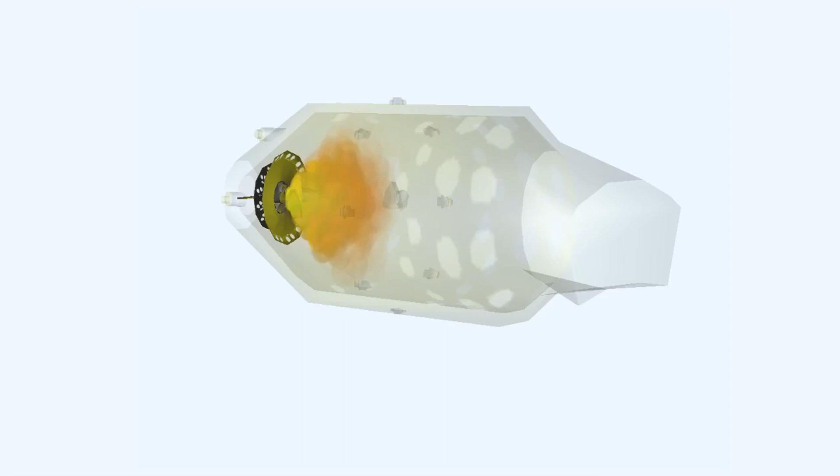As previously stated, theoretically combustion in the gas turbine engine occurs at a constant pressure. This is achieved partly through the continuous process of the Brayton cycle, and also by the fact that the combustion chamber is not an enclosed space.

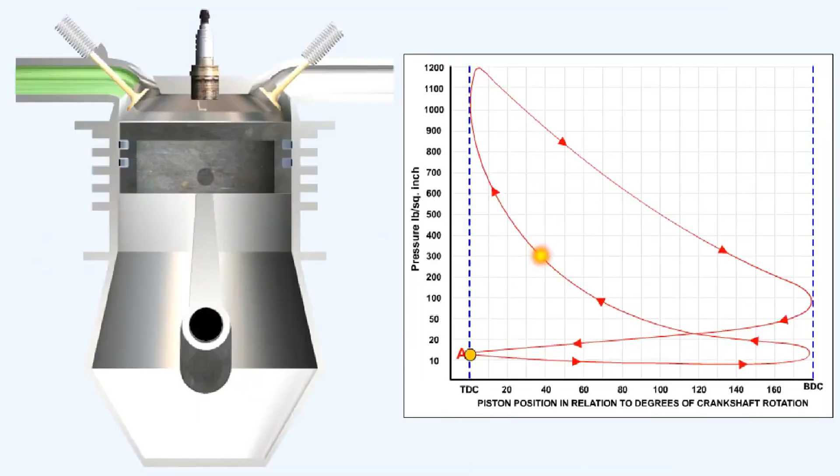These circumstances ensure that there are no fluctuations of pressure in the engine as there are in the piston engine, where peak pressures greater than 1,000 pounds per square inch have to be accommodated.

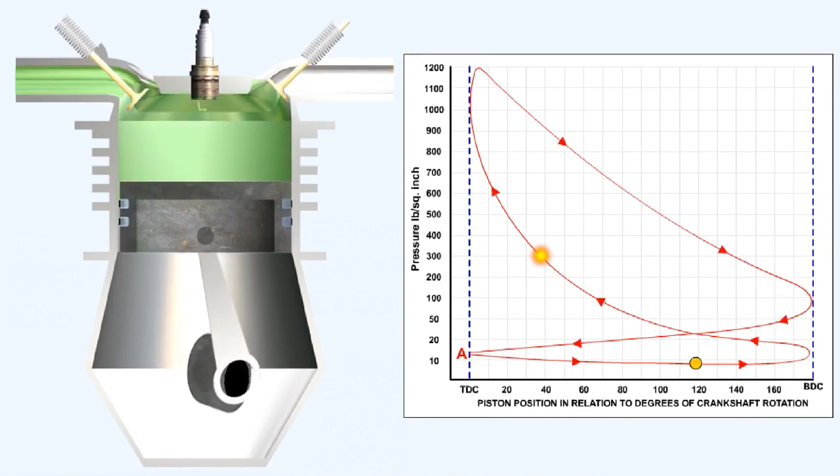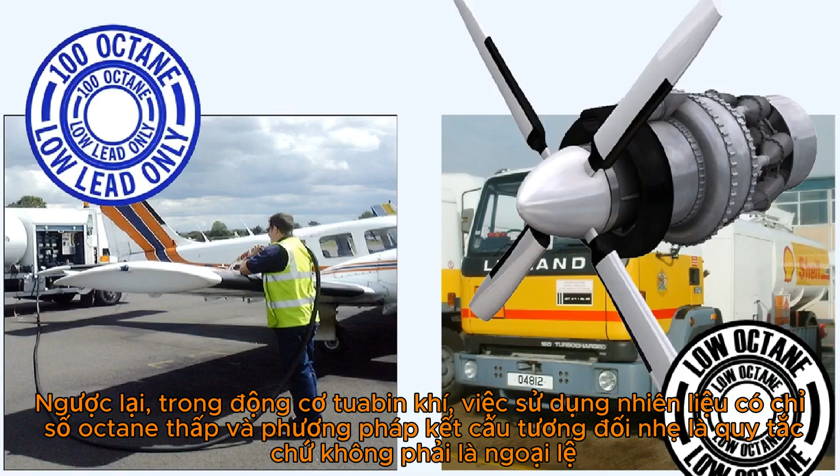These high internal pressures necessitate utilizing extremely strong and heavy construction in the piston engine, and also, if detonation is to be avoided, the use of high-octane fuels. In contrast, in the gas turbine engine, the use of low-octane fuels and relatively light construction methods are the rule, rather than the exception.

The turbojet is a heat engine. The higher the temperature attained in combustion, the greater the expansion of the gases, and hence the greater efficiency of the engine. There is, however, a limit to the amount of heat that can be released into the turbine from combustion.

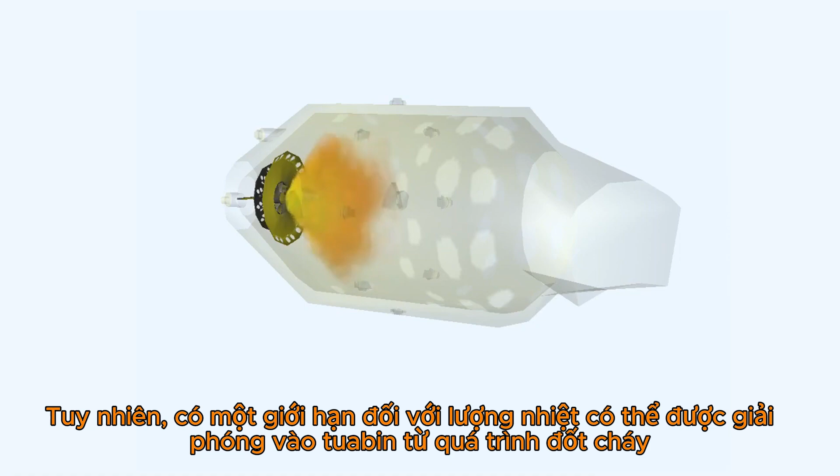This limit is imposed by the materials from which we manufacture the nozzle guide vanes and the turbine blades. The Germans' inability to produce materials which could withstand the heat of the gas stream was the main problem with the early German gas turbine engines.

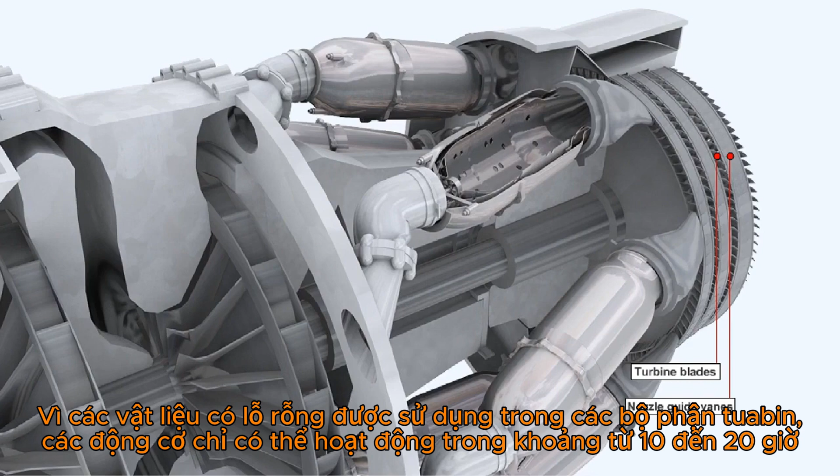Because of the poor materials used in the turbine assemblies, the engines would only run for between 10 to 20 hours before the turbine blades suffered meltdown and engine disintegration commenced, usually in a quite catastrophic fashion.

The use of modern materials and extremely efficient cooling methods in the nozzle guide vanes and the turbine blades has enabled the use of much higher gas temperatures in the latest engines. This has resulted in the more modern engines having a higher thermal efficiency than their predecessors.

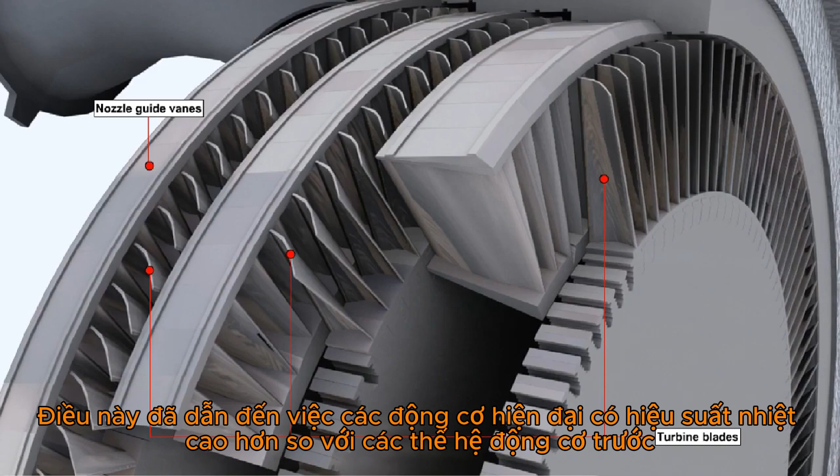Gases behave differently from the other two commonly studied states of matter, solids and liquids, so we have different methods for treating gases and understanding how they behave under certain conditions.

Gases, unlike solids and liquids, have neither fixed volume nor shape. They are moulded entirely by the container in which they are held.

There are three variables by which we can measure gases: volume, pressure, and temperature.

We'll discuss two of the so-called gas laws which are most pertinent to the operation of the gas turbine engine: Boyle's law and Charles' law.

Robert Boyle was born in 1627 in Ireland. He made important contributions to physics and chemistry, but is best known for the law which was named after him, concerning an ideal gas.

Boyle's law states that, in a gas which is held at a constant temperature, the volume of that gas is inversely proportional to its pressure, or pressure times the volume equals a constant. This holds true where P is the absolute pressure of the gas, and V is the volume occupied when the pressure is P.

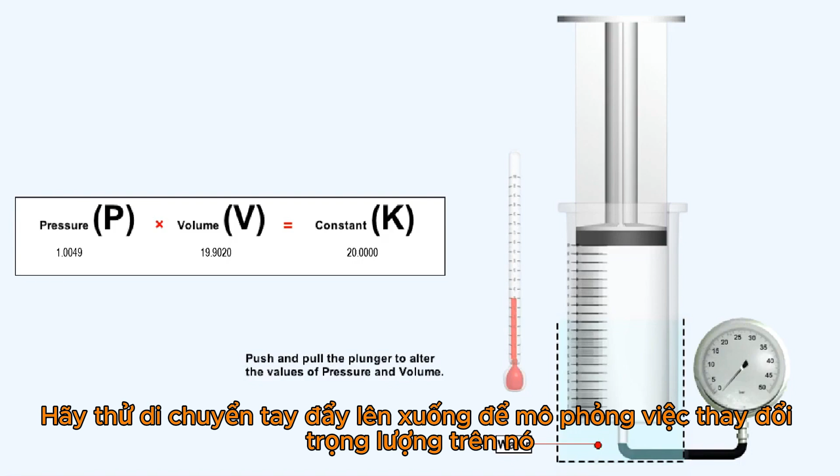Try moving the plunger up and down yourself to simulate changing the weight on it, and note that the results of P times V always remain a constant.

Because of the interest in hot air balloons in the early 1800s in France, Jacques Charles and Joseph-Louis Gay-Lussac made detailed measurements on how the volume of a gas was affected by its temperature. Just as Robert Boyle made efforts to keep all properties of the gas constant, except for the pressure and volume, so Jacques Charles took care to keep all properties of the gas constant, except for its temperature and volume.

Charles' law, or Gay-Lussac's law, states that if any gas is held at a constant pressure, its volume is directly proportional to the absolute temperature, or, if stated as a formula, the volume divided by the temperature is a constant.

Just as we did to demonstrate Boyle's law, we'll replicate an experiment similar to one carried out by Jacques Charles.

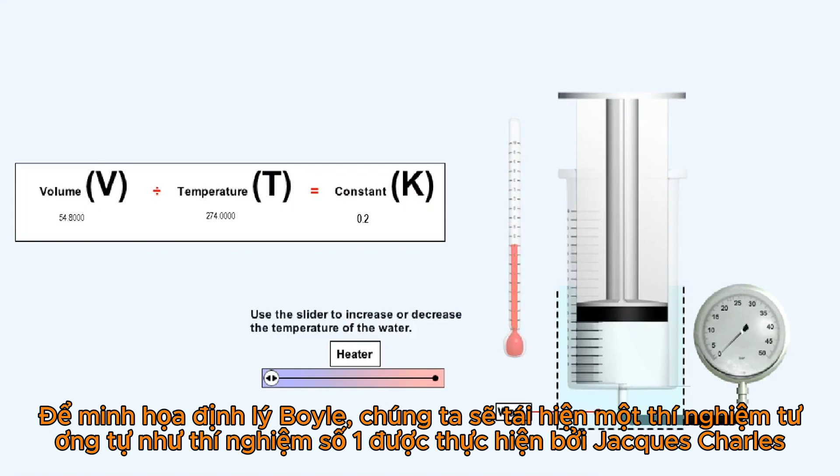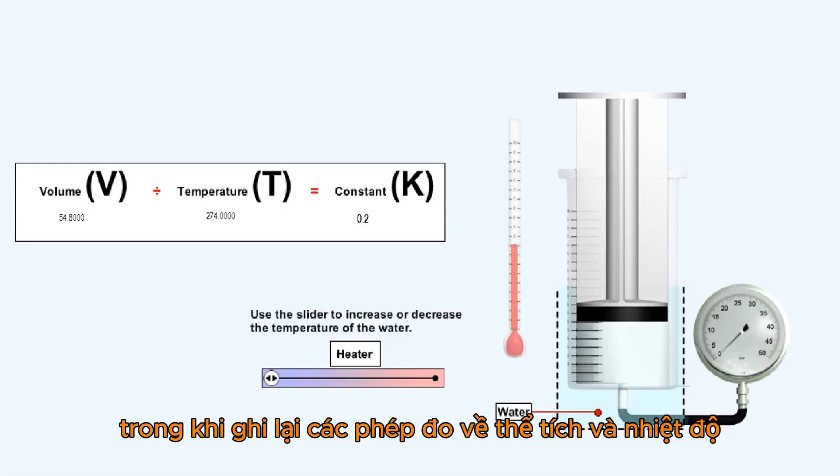If we partially fill a calibrated syringe with air and place it in a container of water, then by increasing or decreasing the temperature of the water, and thus increasing or decreasing the temperature of the air inside the syringe, while taking readings of the volume and temperature, and then dividing volume by temperature in degrees Kelvin, we see that the answer is a constant. Remember that, in theory, the pressure inside the syringe remains constant also.

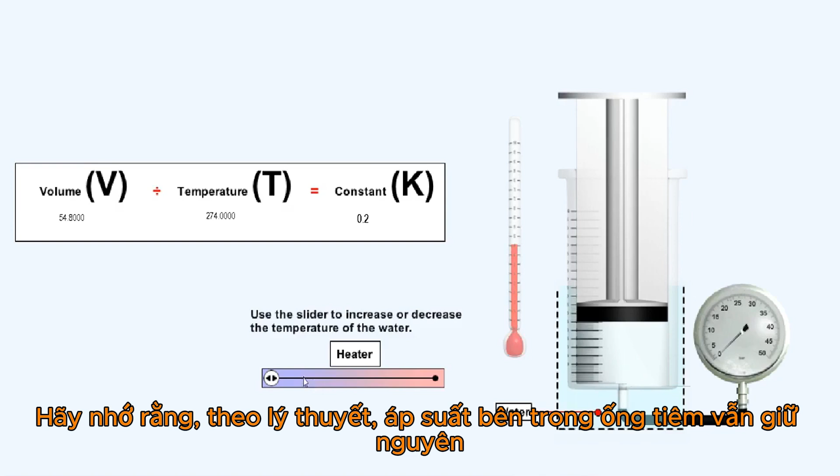Try changing the temperature of the water for yourself, and notice that the results of the volume divided by the temperature remain a constant.

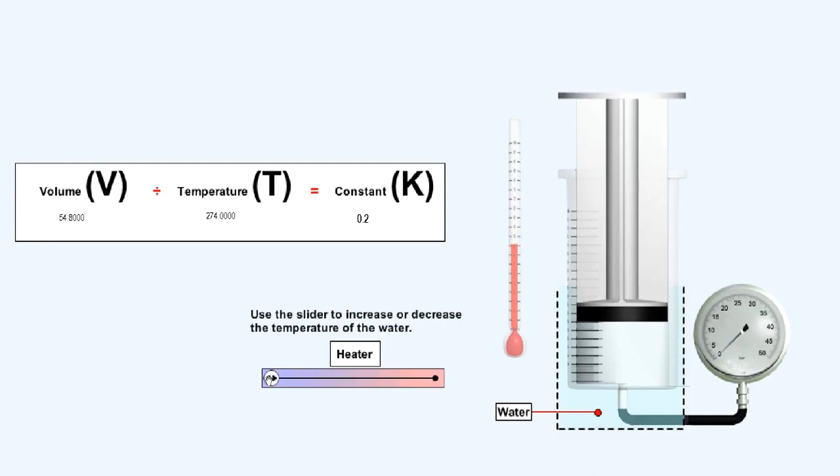Although both Boyle's law and Charles' law work in theory, we are unable, with existing technology, to make them work in practice. For instance, it's impossible as yet to increase the pressure of a gas without increasing its temperature, because of the adiabatic heating which inevitably occurs. Remember the example which is consistently quoted of how a bicycle pump always heats up when air is pumped into a tire.

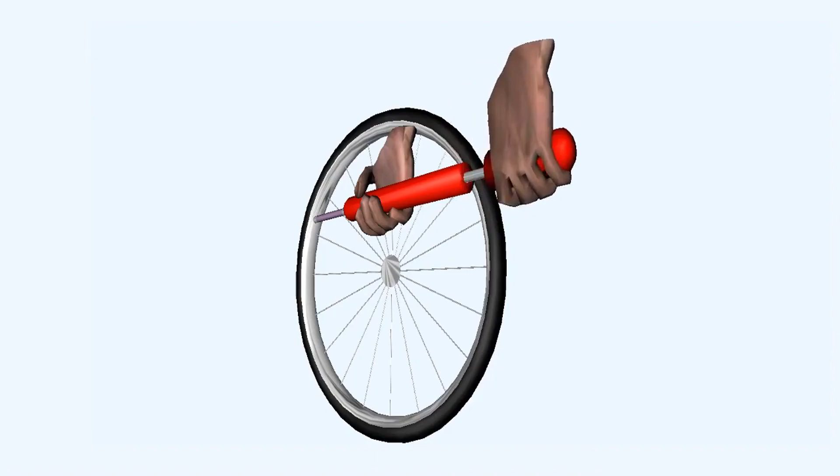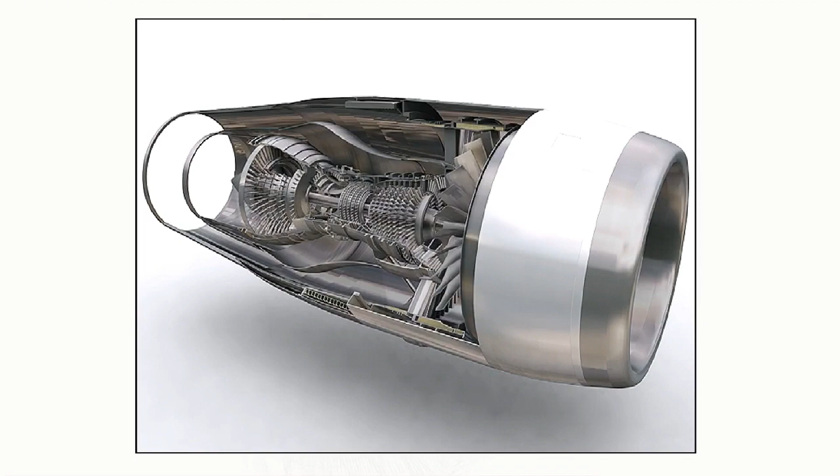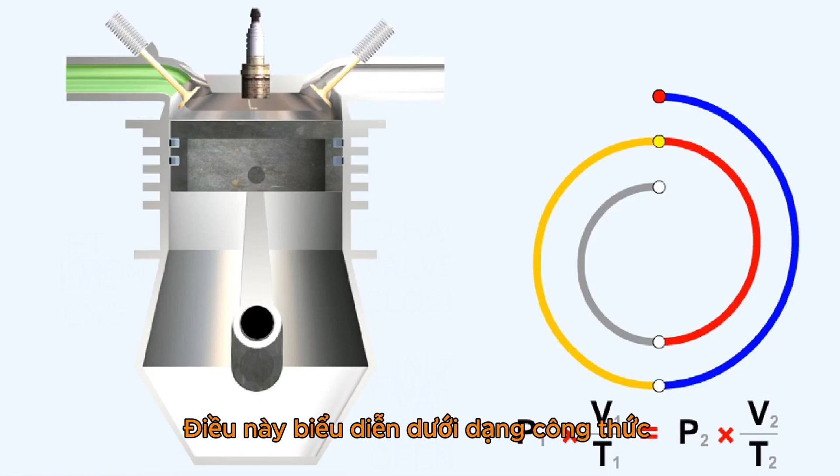By using Boyle's and Charles' law together, we get a practical method of determining what is happening to the gases inside the gas turbine engine, where temperatures, pressure, and volume are all changing constantly. With the scientists' usual lack of imagination, they have named the integrated Boyle's and Charles' law the combined gas law. The combined gas law represents the relationship between volume, pressure, and temperature. This may be shown as P1 times V1 over T1 equals P2 times V2 over T2.

The three main stages when these conditions change in the gas turbine engine are during compression, combustion, and expansion. During compression, work is done to increase the pressure and decrease the volume of the air. There is a corresponding rise in its temperature. Just as they do in the piston engine, higher compression ratios give higher thermal efficiency and lower specific fuel consumption.

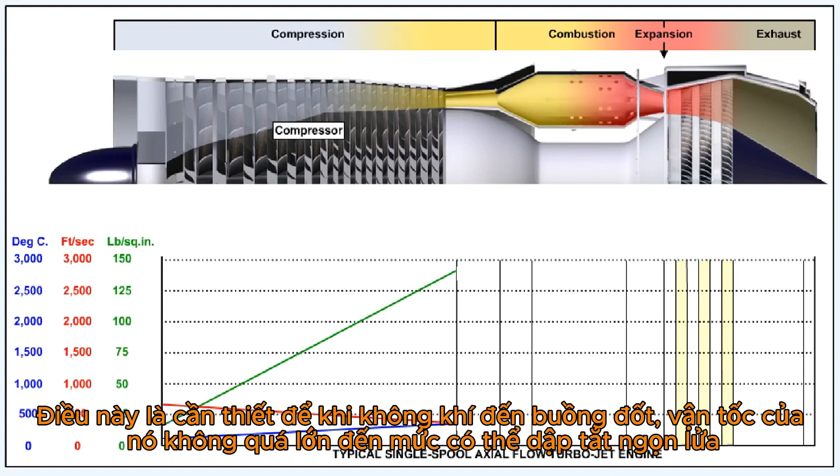Notice that the velocity of the air as it progresses through the compressor is actually reducing. This is required so that when it gets to the combustion chambers, its speed is not such that it will extinguish the flame.

During combustion, the addition of fuel to burn with the air increases the temperature, and there is a corresponding rise in its volume at an almost constant pressure.

The velocity of the gas flow continues to reduce through the combustion phase, until the end of the combustion chamber, which, due to its convergent shape, initiates an increase in its value. The reason for this will soon become apparent.

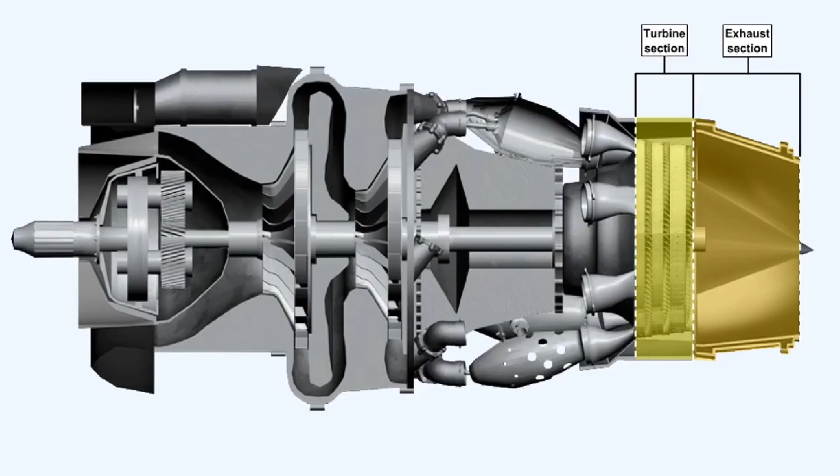During expansion, when some of the energy in the gas stream is being converted to mechanical energy by the turbine, there is a decrease in both the pressure and the temperature of the gas with a corresponding increase in its volume.

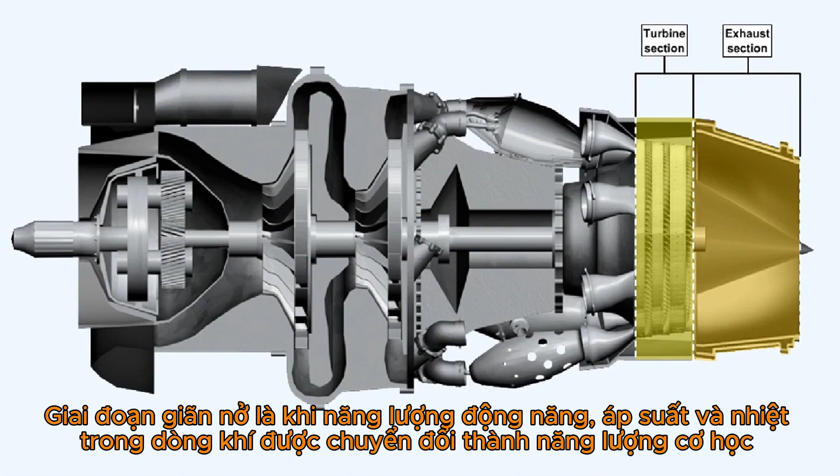The changes in velocity over the expansion phase are a little more complicated than in the previous phases. The expansion phase is when the kinetic, pressure, and heat energy in the gas stream are being converted into mechanical energy by the turbine to drive the compressor.

The turbine is most efficient at converting the kinetic energy in the gas stream into mechanical energy, and in order to do this, the nozzle guide vanes which precede each turbine rotor stage are shaped to form convergent ducts.

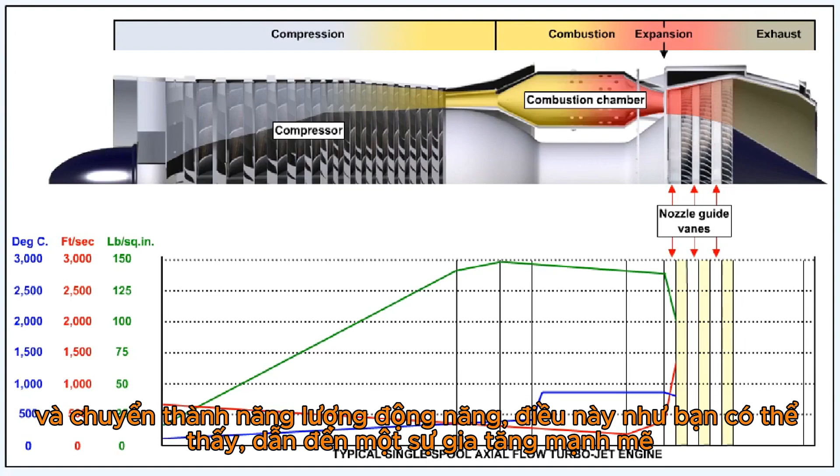At the nozzle guide vane stage, the pressure energy, and to a lesser extent the heat energy, are reduced by the convergent ducts, and converted into kinetic energy, which, as you can see, shows a dramatic rise.

The turbine rotor following each nozzle guide vane stage reduces this kinetic energy by converting it, and some of the remaining pressure and heat energy, into mechanical energy.

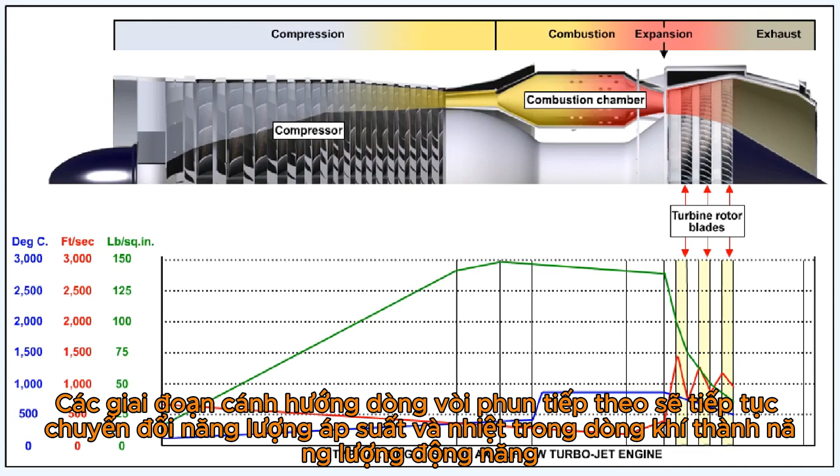Succeeding nozzle guide vane stages will continue to convert the pressure and heat energy in the gas stream into kinetic energy, and the turbine rotor stages which follow them will convert that kinetic energy into mechanical energy.

The gas stream is then directed into the exhaust nozzle, where the velocity decreases at the expense of a small rise in pressure. This decrease in velocity assists in maintaining the losses in the jet pipe due to turbulence at a minimal level.

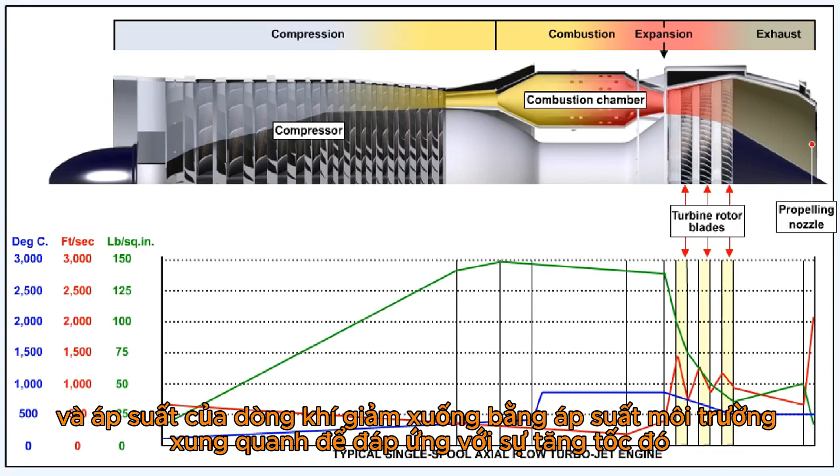Finally, as the gas passes through the sharply convergent propelling nozzle, the duct shape causes a distinct increase of velocity, and the pressure of the stream drops to that of ambient in response to that increase.